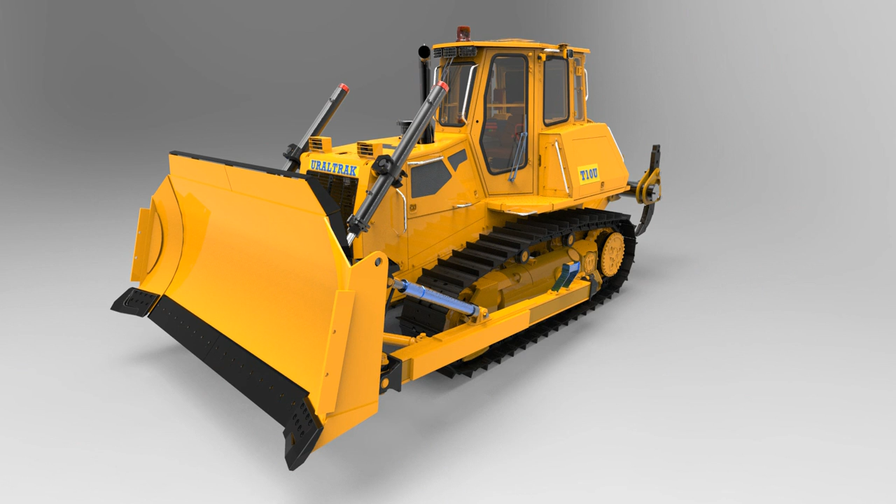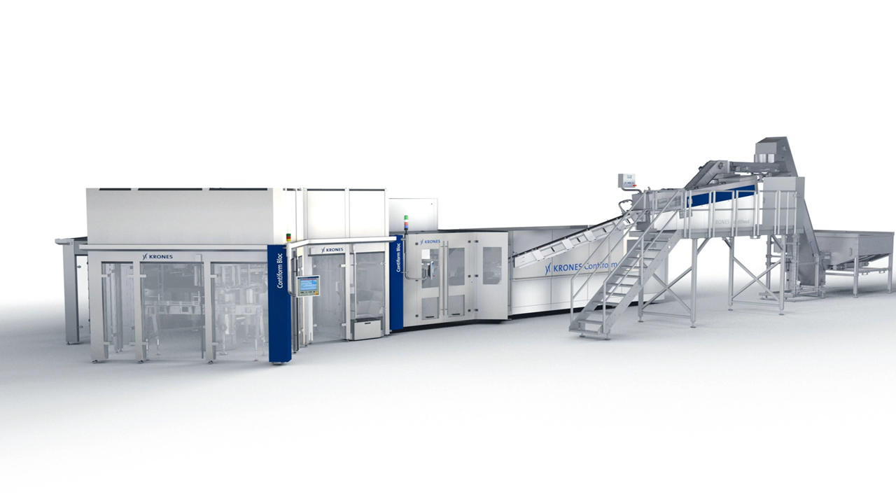Solid Edge continues to set the standard for streamlining 3D designs of products, whether they're a single part or an assembly of over 500,000 components. In this demonstration, we'll show how Solid Edge ST7 speeds design of areas around a bulldozer engine.

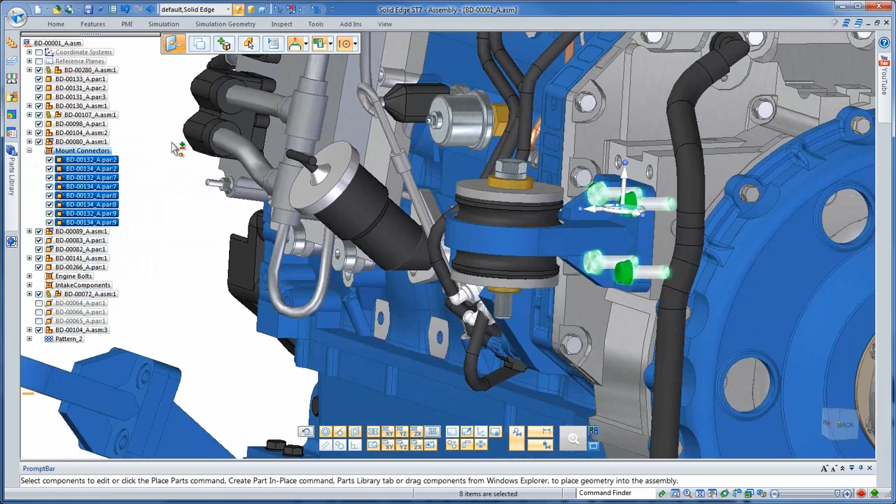First, we'll work on the engine mounts. This engine has 4 mount locations, and the appropriate bushings, washers, tension, and mounting bolts are organized into a single subassembly, which we've placed in one location. First, we'll grab the 4 sets of mounting bolts and washers by selecting one set, then use Select All Identical Parts to include the other 3. We'll also select the tension bolt, washers, and bushings within the mounting assembly.

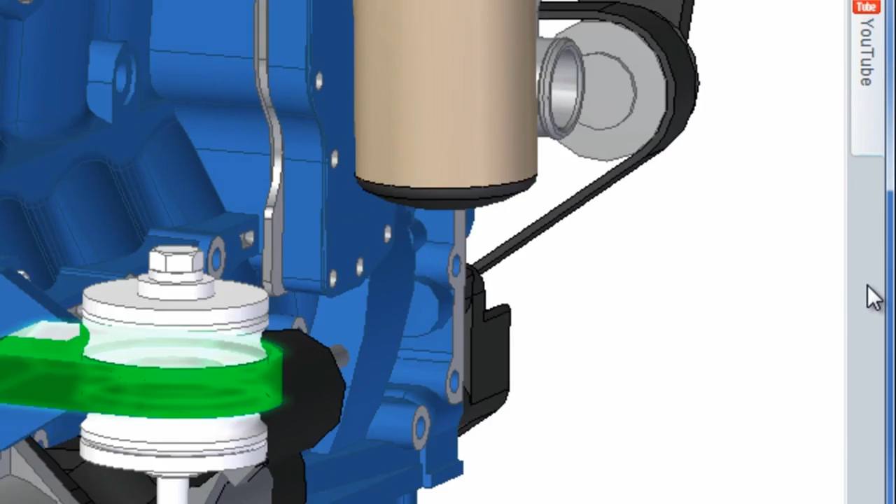Watch as we use Duplicate Components to copy all of the selected hardware from the initial position to a second position. Note the preview of the duplicate. A valuable option within this command is Select Matching Occurrences, which finds the 3rd and 4th mounting positions towards the rear of the engine. Very smart and very fast.

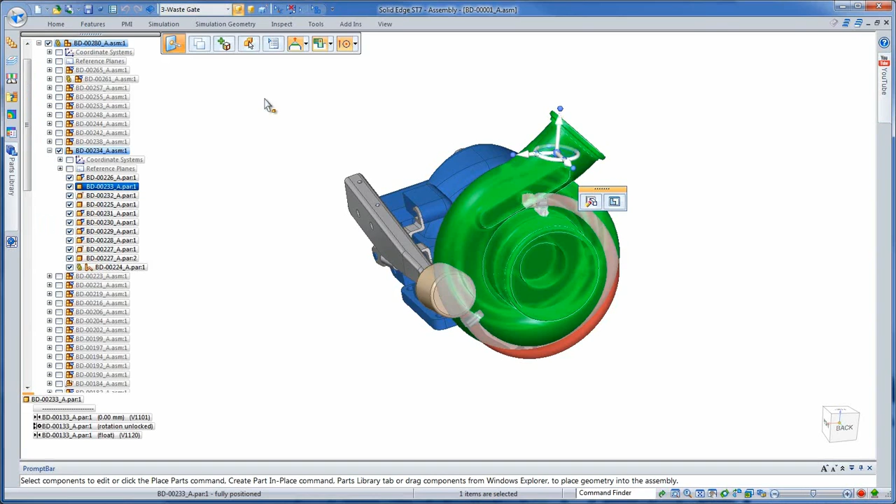Impressive real-time rendering capabilities are now available within Solid Edge ST7, courtesy of KeyShot. This easy-to-use but powerful application is integrated into Solid Edge for advanced photorealistic visualizations of your 3D design, without ever leaving the modeling environment. Again, working with the bulldozer engine, we'll open its turbocharger assembly.

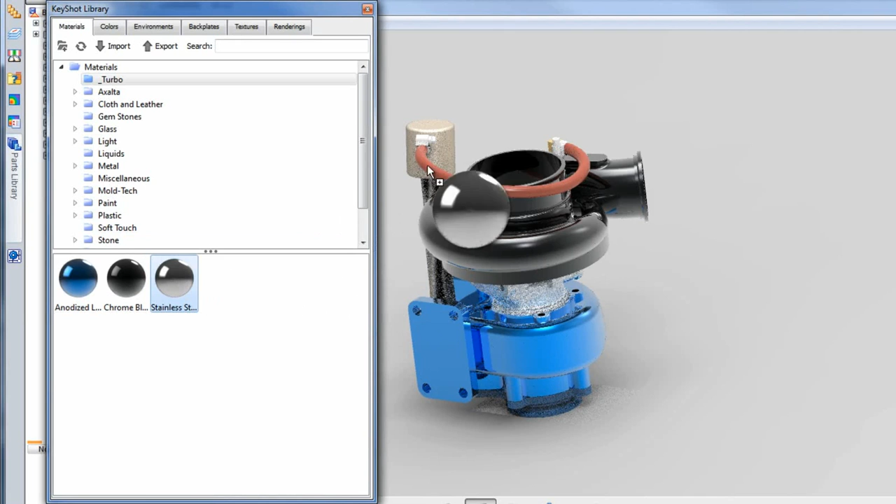KeyShot is available from the Solid Edge command ribbon and will open the turbocharger into a separate rendering window. Appropriate colors and materials are automatically transferred from the modeling environment, though you can also assign materials and colors from KeyShot, and watch the turbocharger update before your eyes.

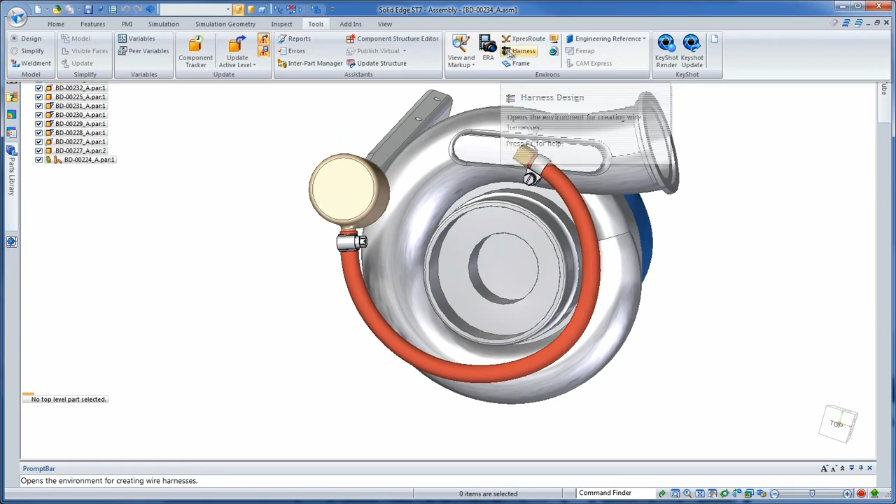Getting back to modeling, we want to be able to rotate one port of the wastegate tube. As we grab it and rotate, you can see the tube itself lengthens. In real life, this tube would be cut to a specific length and would not elongate. You can model that realistic behavior by editing the tube's underlying key point curve and selecting the new option, Curve Length Step. The new Fixed Length option allows us to define a finite length of the curve, which ensures the tube length is fixed as well.

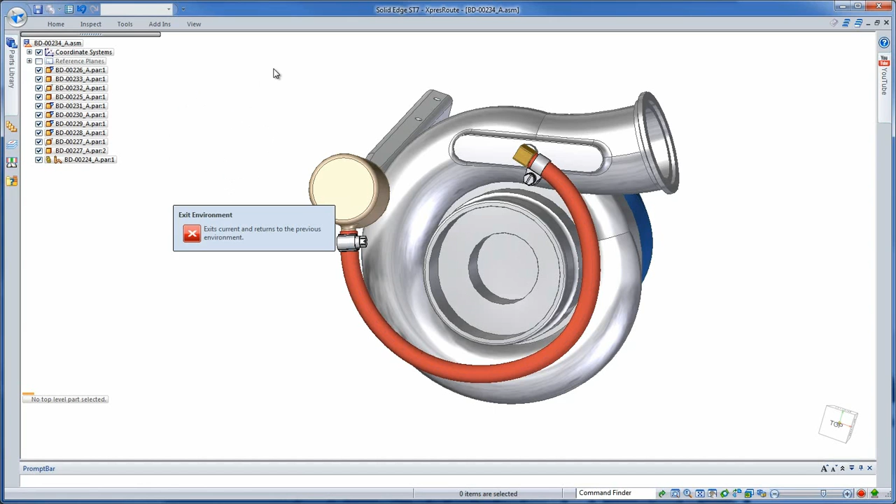We can even constrain the curve to only move in a specific direction, a great option to replicate conditions under which the turbocharger is actually maintained. So you can use the 3D model to develop maintenance documents for the real component. Returning to the assembly, watch as we rotate the intake port. The tube's length remains fixed as it would in a real system.

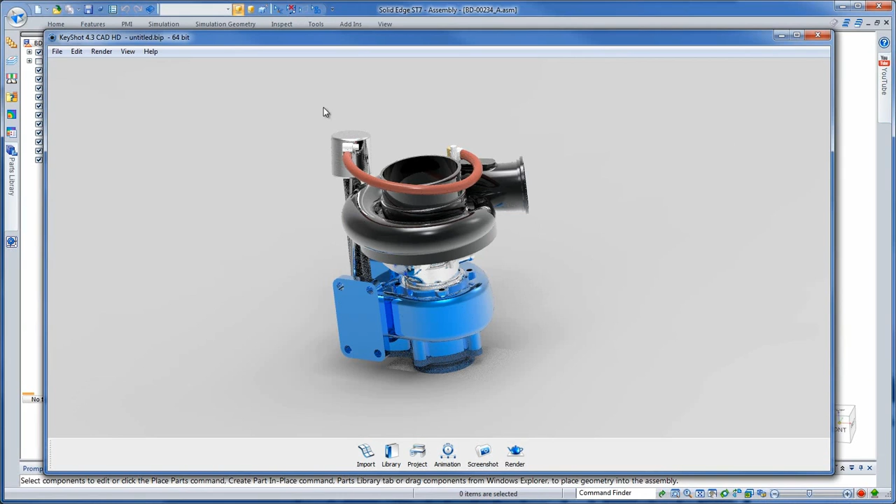Let's go back to KeyShot, but first we'll select KeyShot Update to ensure all of the model changes propagated to the rendering. The resulting realistic imagery could greatly enhance any equipment maintenance manuals.

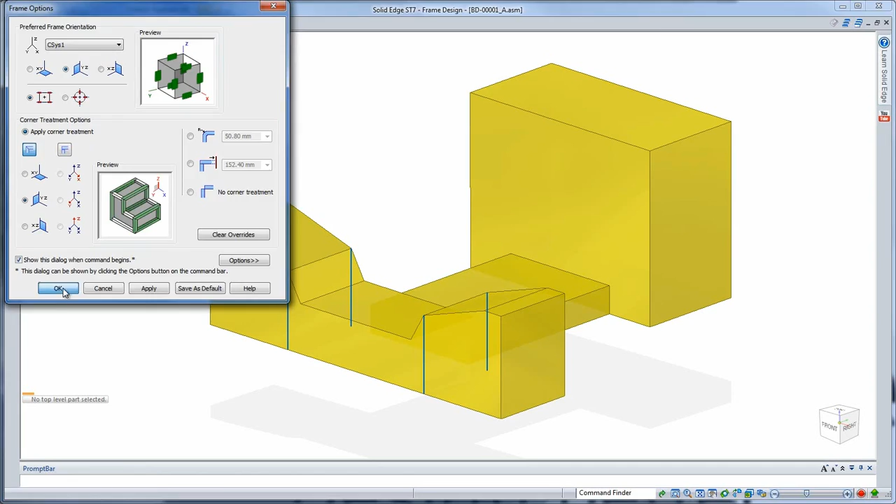Now we want to build an engine test stand. For this, we'll use the frame construction tools within Solid Edge ST7. We'll begin with a solid representation of the test stand and use the edges of these bodies to guide frame creation. The frame command allows you to set a preferred orientation so you get mitered corners placed how you want the first time. Select a solid body and Solid Edge automatically places members based on your preferred orientation.

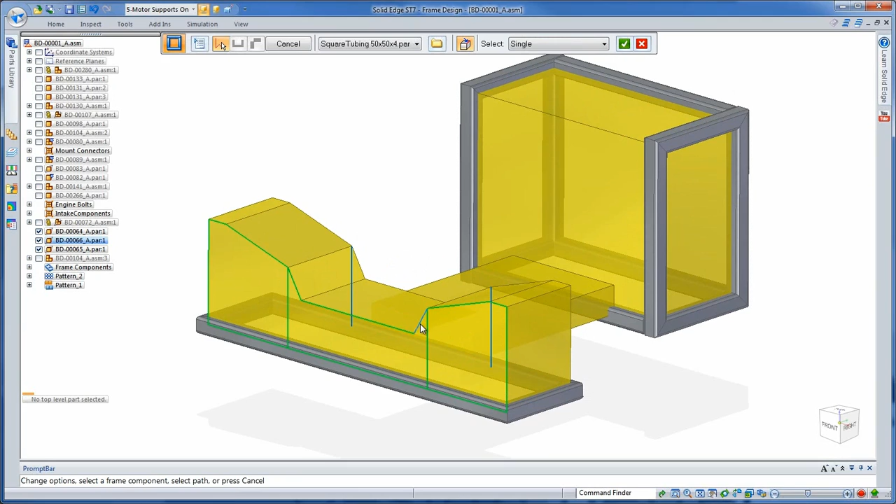Let's remove the center member so it won't interfere with the engine. While we're creating frame members, we can switch between single, chain, face, and body options to get the custom framework for our engine test stand. We'll place more members to connect the front and back of the stand.

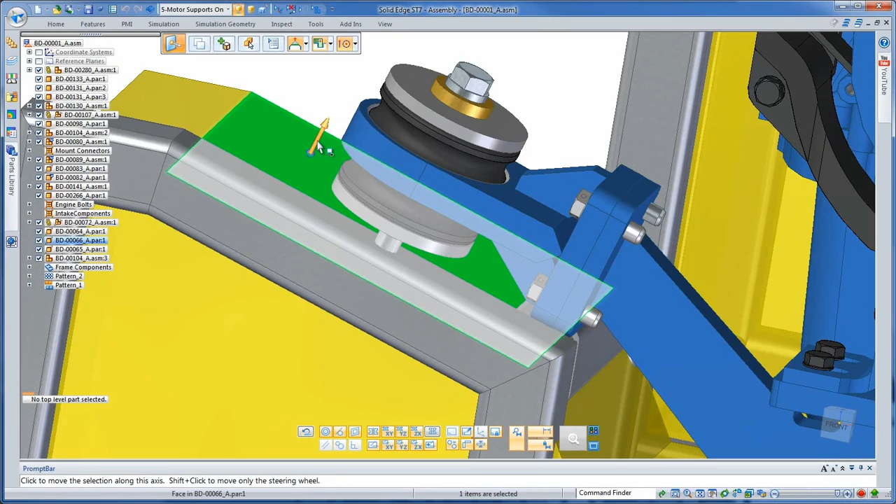Once complete, we'll display the engine and determine how it fits on the stand. In the front, the frame needs to meet up with these mounts, so we'll use synchronous modeling to move a face of the solid and thus the frame to match them up.

With ST7, we listened to our customers' needs and have delivered a fast, flexible, and more intuitive suite of product modeling tools, which allow you to focus more on your designs and less on the tools. Solid Edge. Design better.